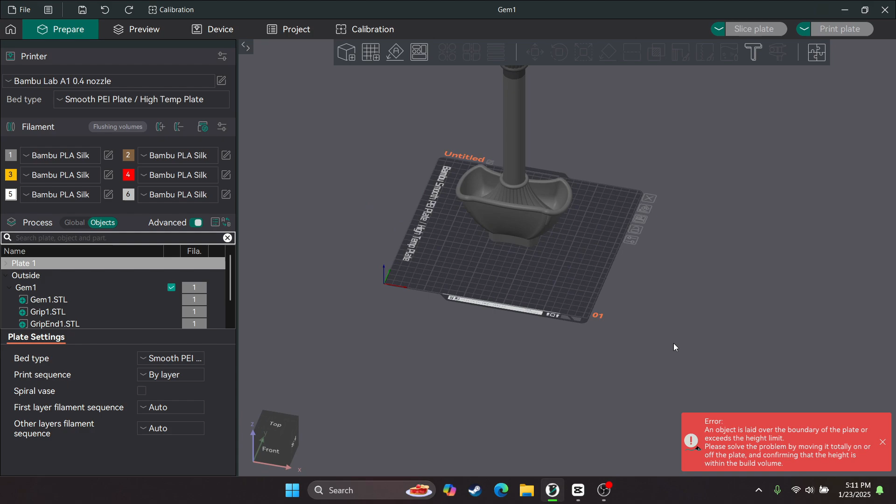Alright, so after you get the files, you'll get them like this. The guy did a really good job on these files, in my opinion. I started by getting the handle, the blade, and then the scabbard. You know, setting myself up, see what I got, see what I'm working with. Thinking about how I will be splitting all of these files.

Looking at everything. Then I started checking out the sword, split it, multiple pieces, and right here this is an option on Orca that's really good. Arranges everything for you. I use this arranging tool to start from there, start in a spot, and it gets everything nice and situated on the plate and then work my way from there.

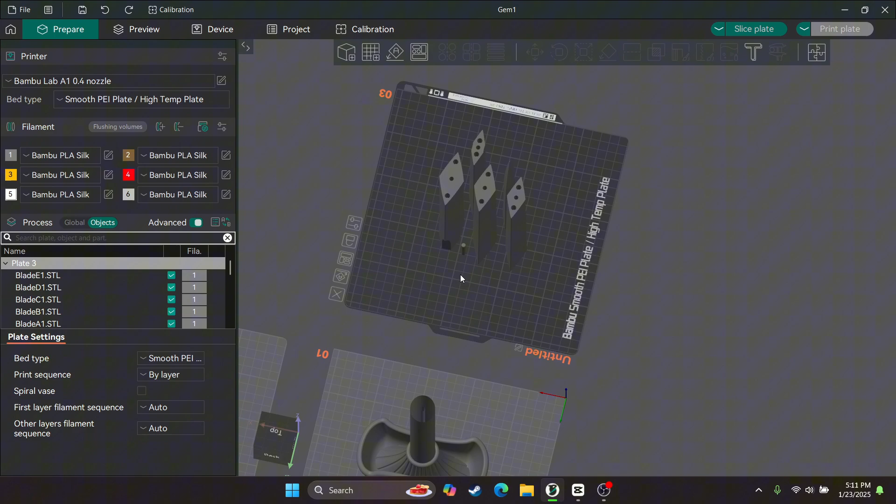I see that these pins are like aligning pins. On the name it says pin 8. Usually that means that it has 8 pins, so I went ahead and cloned them. I cloned 7 because there's already 1. I should have cloned them in the other plate instead of grabbing them one by one. Kind of wasted some time there.

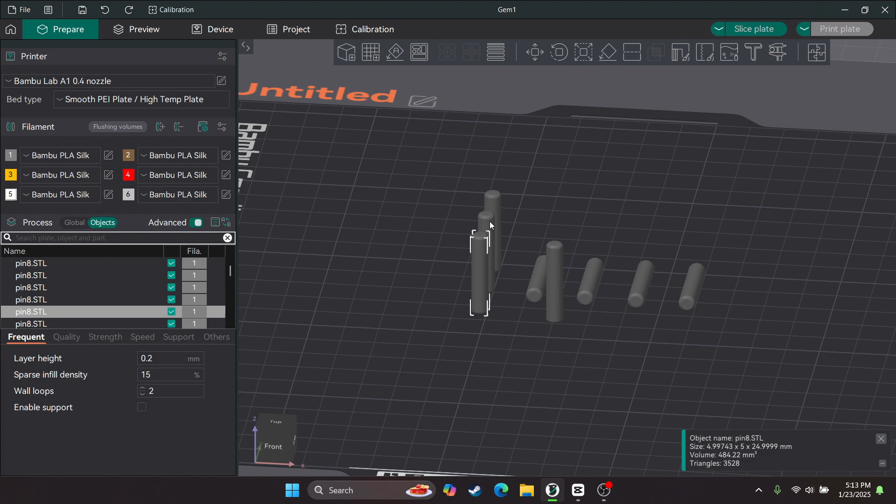These pins right here, I wanted them to be strong. I wanted to print them sideways. All the layers are nice along the axes of the part, because if you print them up and down, they're a little bit weaker. I shouldn't rely on them structurally for the blade, but it's just a little bit extra you can do to add more strength to your blade.

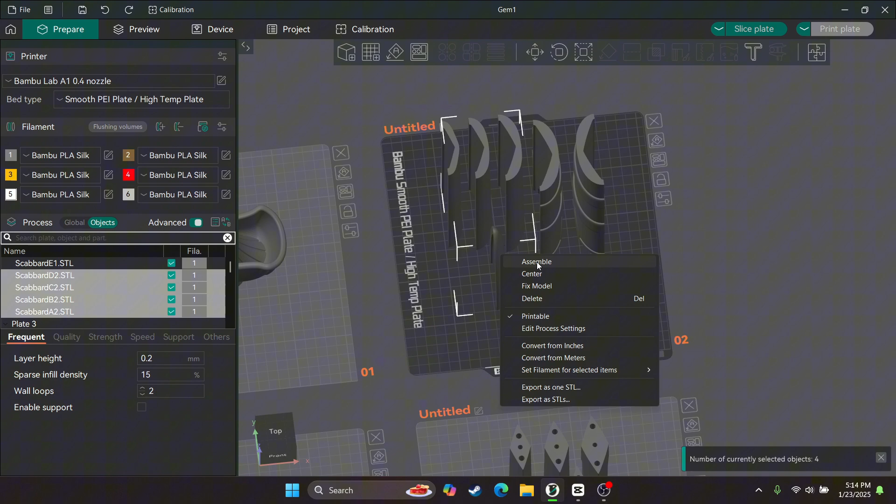After this, I started working on the scabbard. I do notice that there's missing pieces of it. I can just split them all and then clone the missing pieces, since there would be a mirror of them. Easy way to clone all of them at once: if you click on all of them, you can make them an assembly, and then you take that assembly and clone that assembly. After that, you mirror it, and then you get a copy of a bunch of different pieces instead of doing it just one by one.

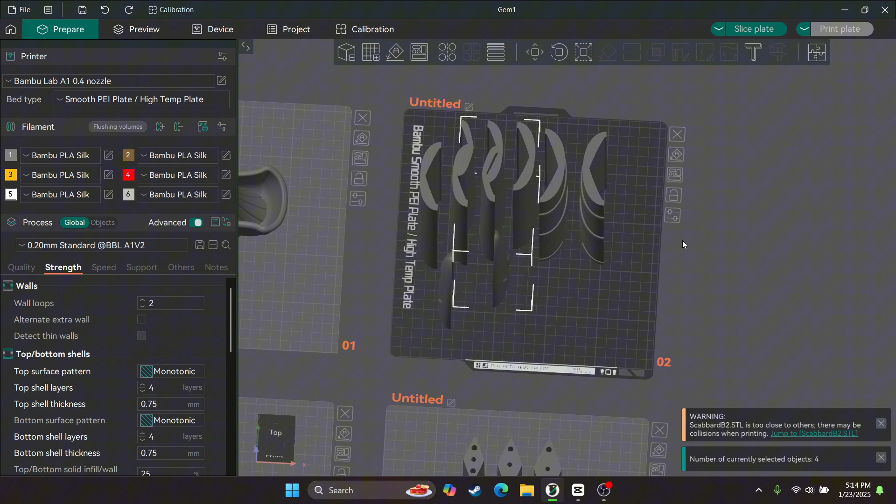After that, you take it and you split all the pieces so they're all individual pieces to themselves, and then you hit arrange. I didn't like the way they were set up, so I wanted to arrange them because I know if these are gonna need supports, those two in the bottom, when I make them an assembly, I'm going to be able to save a little bit of material on the supports. It won't be an issue with them running into each other when the file gets created. And then I got everything to where I feel it's going to print perfectly fine. That looks good to me.

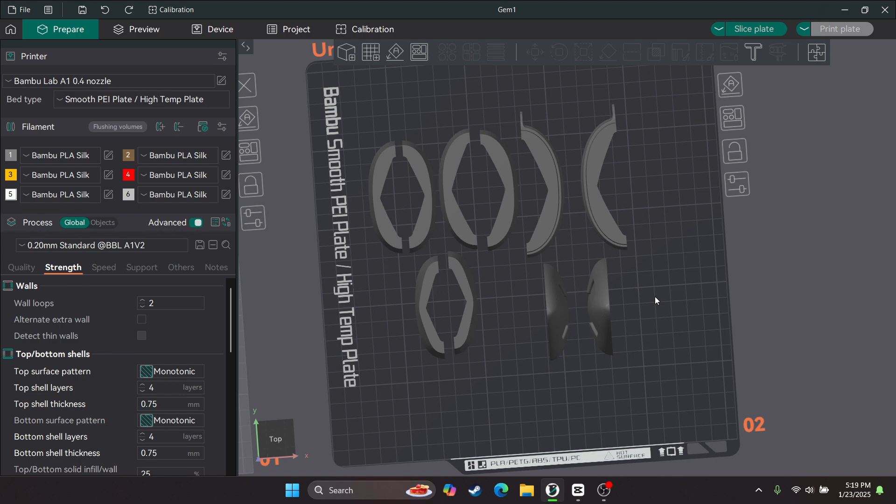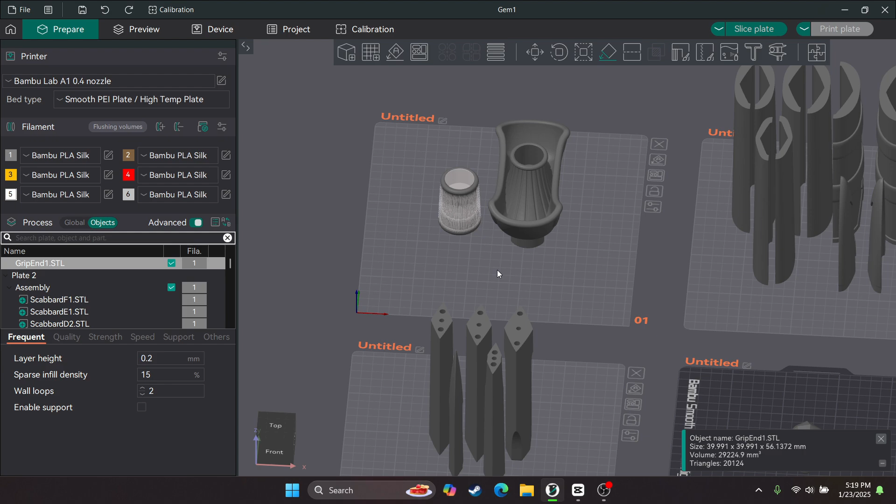Now with the handle, it was about 4 pieces in total. I know the gem is a different color and the handle's also a different color, but the pommel area, that's what I'll call it, and the guard, they're both gold, so I'll print them both in yellow. Here I decided to rotate the pommel 90 degrees, 180 degrees. It's just by feel, it felt like that would print a lot better than the other way.

And now we'll get to my settings. I wanted to make this 0.18. I put more walls on it, so I brought down the sparse infill and I put it at cubic. I really like cubic. It's also a lot faster than gyroid.

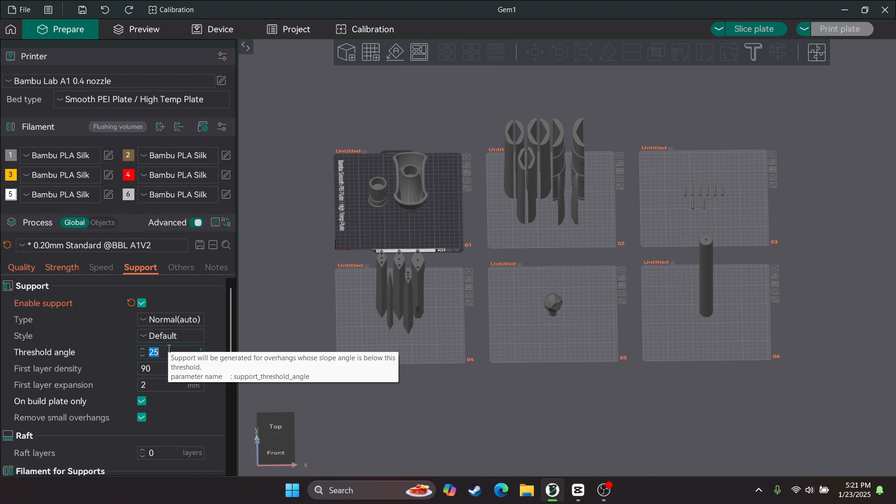For supports, I'll bump that up to 35 using tree supports. And right here, since they're all tall pieces, I wanted to make the brim a lot bigger, and I brought that up to 12 millimeters. And then we see what we got. Right here, I realized I made a mistake. It's normal support, when I wanted tree support.

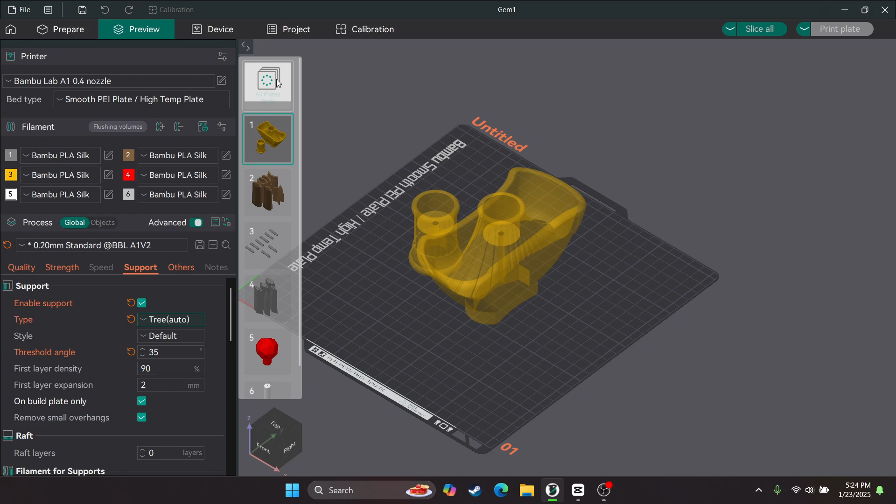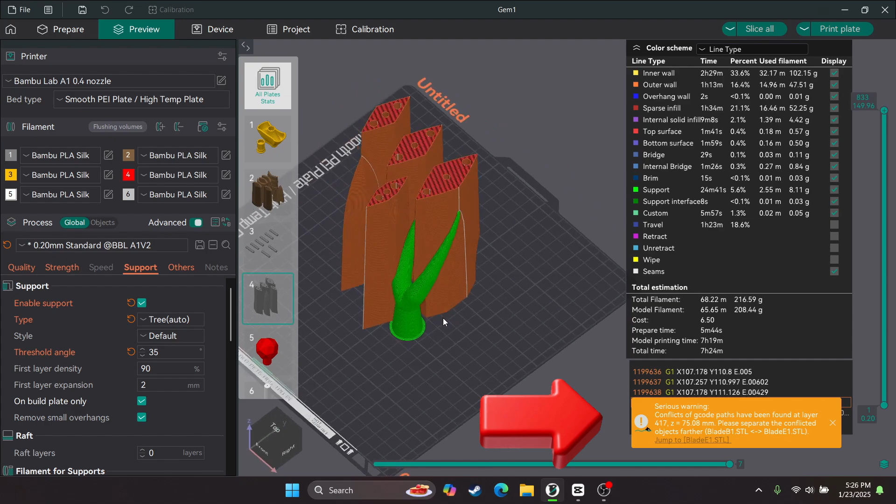That's the actual values. It's gonna take a day and a few hours. That looks good to me. Feel comfortable with that. And then with this, it looks like a mess, but since we made this an assembly, none of the tree supports will conflict with each other. See, like right here, I forgot to make this an assembly, so the tree support is conflicting with the other part, and it also doesn't have a brim.

See, this part also does not have a brim. I can fix that. I clicked inner brim instead of outer. It was supposed to be outer. Take all of these, make them an assembly, and I think now we should be all set. Give them another once over.

Now you see that the tree supports use a little bit less material, but over time that does add up. Right here, they all have a brim. They look good to me. Now the sword is not conflicting with the path of the supports, and everything looks great. All we do is send it all to the machine. It's gonna be a very easy sword. It's not gonna be like the Buster swords at all. Yeah, I said it. Now I already jinxed it.

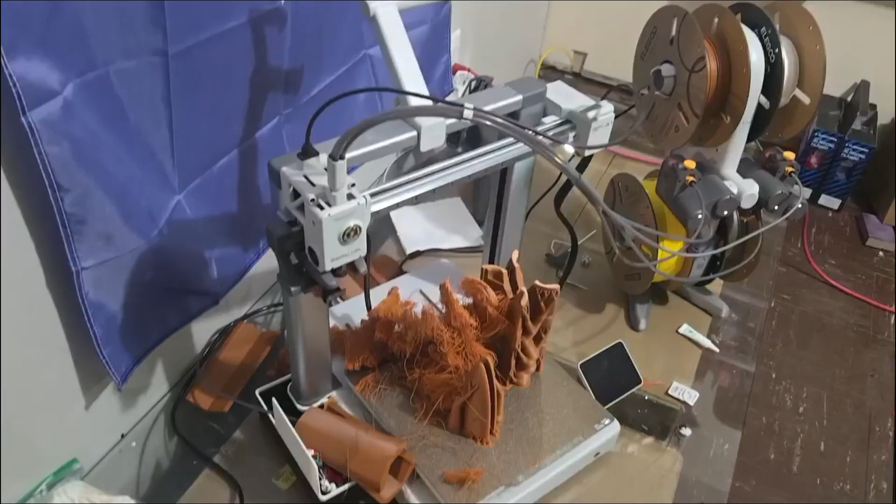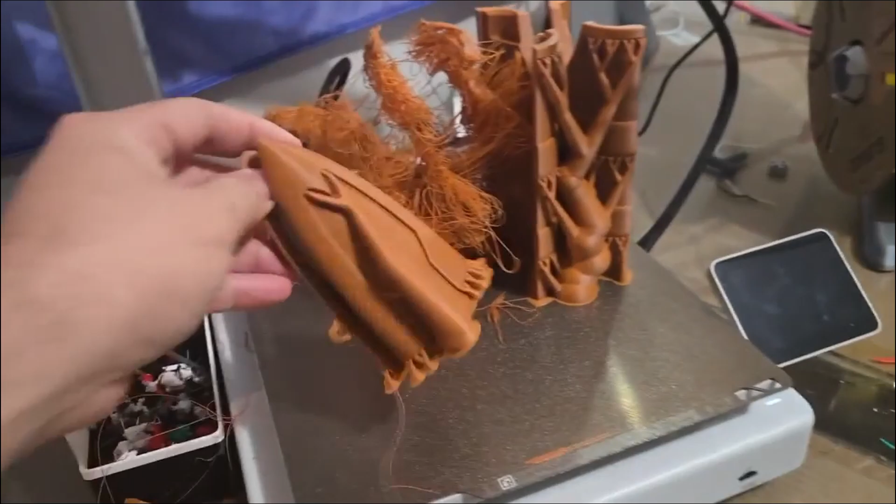Well, that didn't go according to plan. Let me see. These, that's a failure. Yeah, it's a failure. At least these are done. But the rest is just spaghetti. So who wants some spaghetti? I can give you some spaghetti. Is this one done? Oh, we got another one that's fully done, I think. Yeah, this one's done. Some of them got fully done.

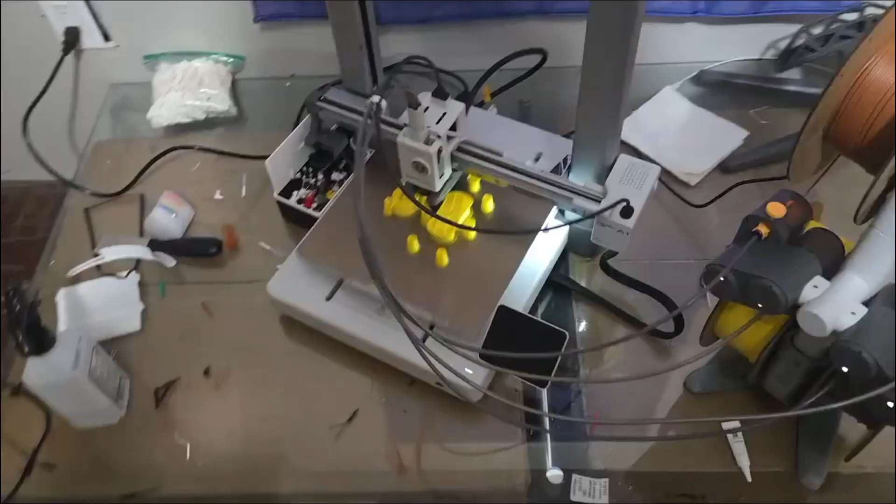Now I'll adjust the program and make the other ones. All right, so this is what we salvaged. Pretty much missing, I think, four pieces. Just 4 pieces. I'll make those, the bottom of it and the top. I haven't welded it together yet. I'll wait till the end, and then I'll put everything together. But right now we're making the guard in yellow. I'll edit the program to only have the ones that are missing, and then we will continue.

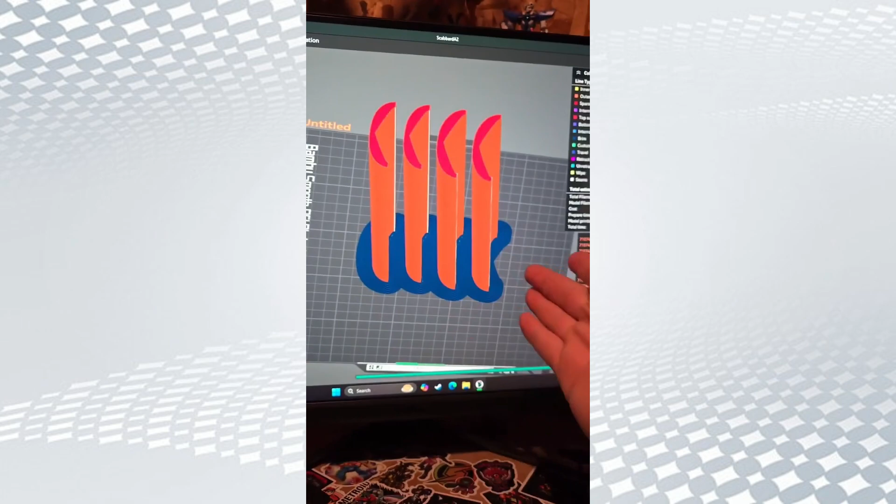To be honest, the reason why they failed, it's a little bit of operator error, because I was just running it full speed. I was running it really fast, but I slowed down the acceleration, so it picks up speed a lot slower. And the brim, the skirt right here, I made it a lot bigger, so it has more grab. It was only like 5 millimeters, a tiny little skirt. Now it's a lot bigger, so it grabs it.

And slow it down, so it's not yanking the bed, since the bed is going back and forth. This should be a lot better. This should work. And it'll take 6 hours. So we'll put that on and check tomorrow morning when I wake up. So that worked out successfully.

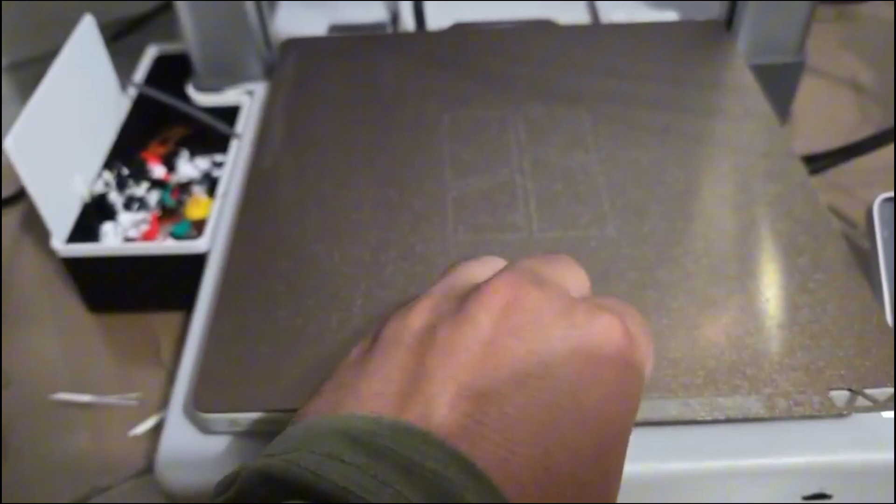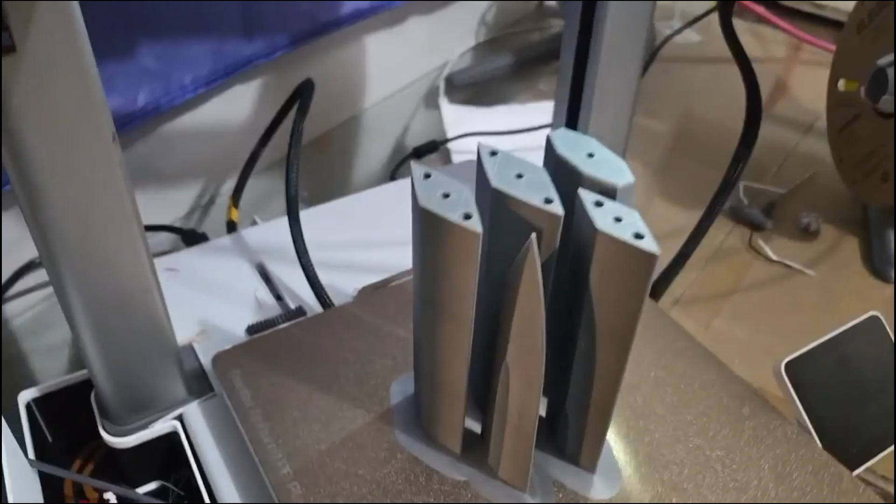All right. Look at that. It's nice to take out this freaking little piece right here. Now let's do the rest of the scab. Look at that. First try. That's the blade done. All right, final piece. Got this right here. The little gem piece.

So after all the pieces were done and printed, what I like to do is take tape. Any type of tape will work. For me, the cheapest one at the moment is painter's tape. I like to have a little mock-up of everything, see how everything fits, making sure everything's aligned, cleaning out all the parts and stuff like that. I'll show you guys building it, going through the process that I usually go through. Feel free to skip ahead, and if you want to stay, enjoy.